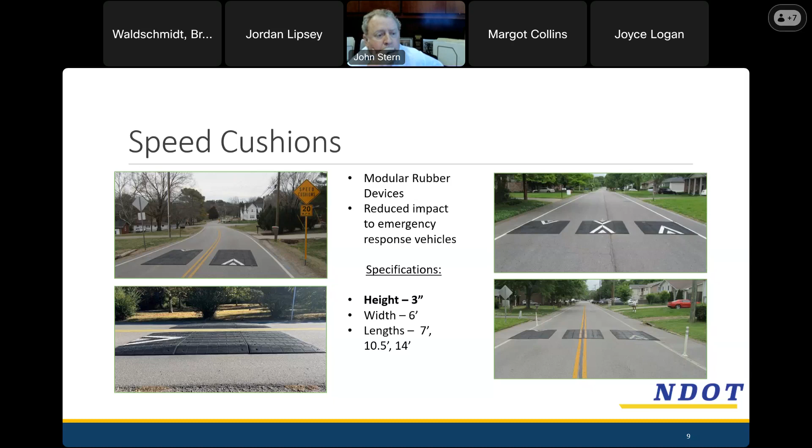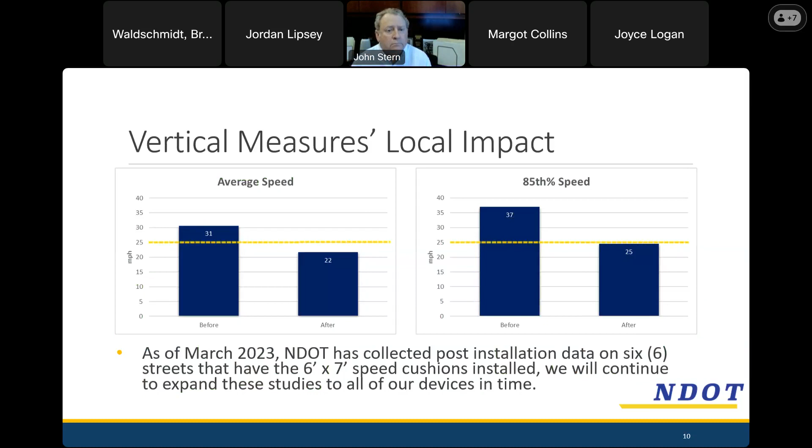And this graph just demonstrates that at NDOT, there have been some before and after studies. We're seeing lowered vehicle speeds once speed cushions get installed on other streets where before and after studies for speed have been done. So we do see that.

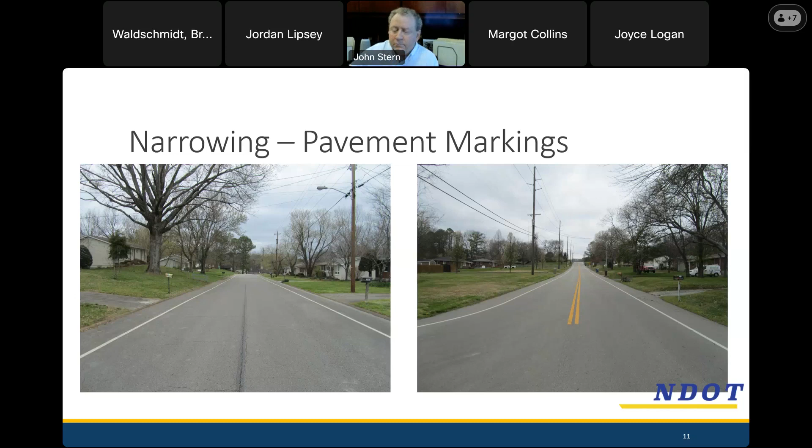We will show that in more detail as well in the design. Another thing that we're proposing, not so much the picture on the right, well, I guess a little bit, since chicanes and bulb outs, some of the intersections along this corridor really just are a very large area of pavement. And so what we wanted to do is, along with the narrowing theme, along with the speed cushions, we wanted to propose some narrowing with some additional white pavement markings, not crosswalks, but white line pavement markings and some of

those vertical white bollards. And on the right, you see it's called a chicane, where a vehicle somewhat has to turn their steering wheel just a little bit to kind of stay straight. So we want to kind of show that as well. So those are the 3 features that we're proposing.

Now, what we want to do is talk through what we're proposing. This is very zoomed out. We have, I think the design's about 6 slides. This is the zoomed out version. Then we're going to zoom in a little closer, and then we're going to zoom in even closer. So just kind of bear with us as we kind of talk through this.

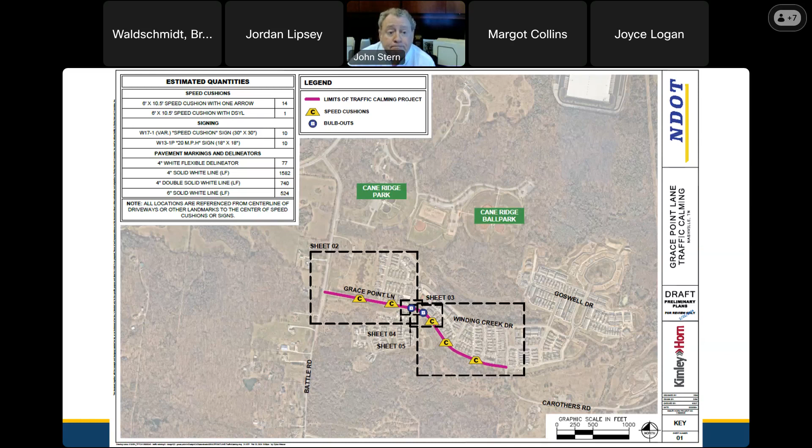We're going to zoom in, start on the west side at the intersection of, I know it's labeled Grace Point Lane, but really there it's Battle Road at Carothers Road. We want to start there. On this sheet, we're proposing 2 speed cushion locations. One is essentially almost in the middle of Battle Road and the western Fairchild Circle intersection. That's where that first set of speed cushions would be based on this design.

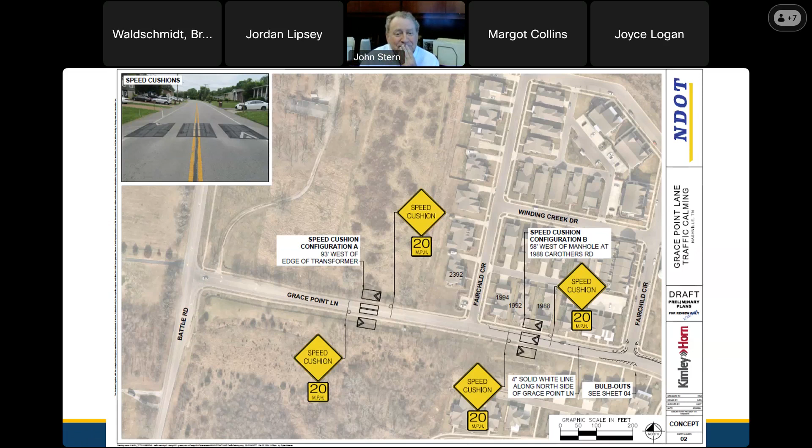Another thing, I know this may be difficult to see, with the width of Grace Point Lane and Carothers Road, we wanted to sort of provide those white line narrowings that we mentioned, but we didn't feel like there was enough width to do it on both sides. So what we were proposing, there's some notes kind of on the bottom here. We are proposing a 4 inch width white line along the north side of Grace Point Lane. So essentially the side where the homes are, we're proposing that narrowing.

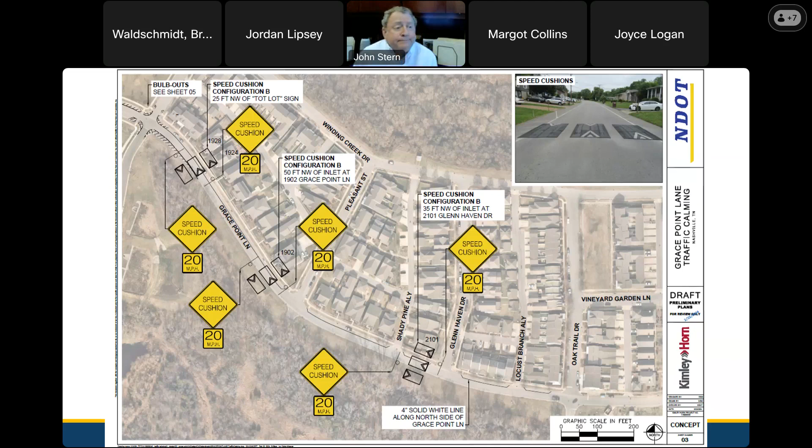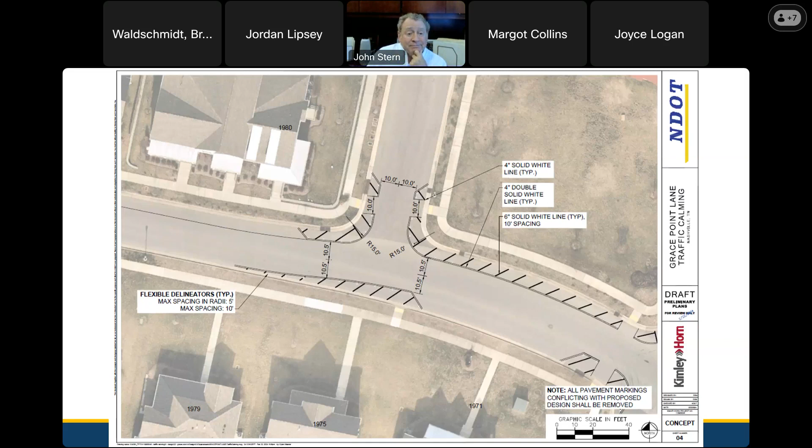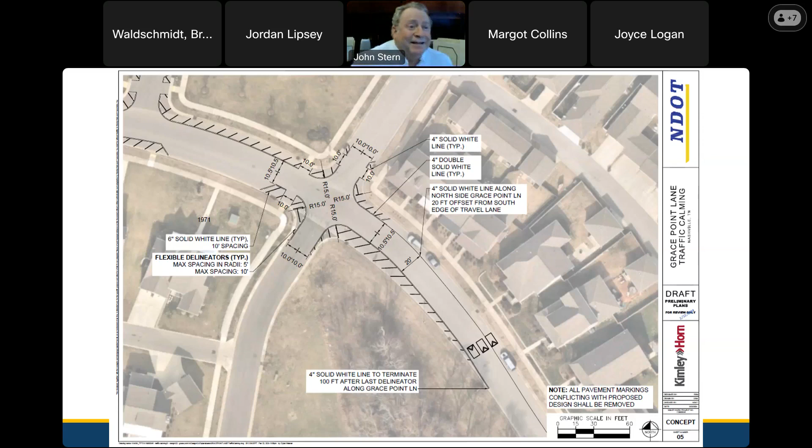So that is a lot. When we're done with the presentation in about 6 minutes or so, we're absolutely willing to come back to hear comments or answer questions.

For the speed cushions, this is sort of if you were floating in the air right over them and looking down, this is what they're going to look like. The one on the upper left is right near Battle, where there's that double yellow. And then all the others are more like the upper right corner. We do 3 speed cushions because we don't want to have a wide area of pavement where the cars who may still want to speed have a lot of room where they can circumvent the speed cushions. So that's why we're proposing 3, so that the gaps aren't too big where cars can try to do what they're not supposed to.

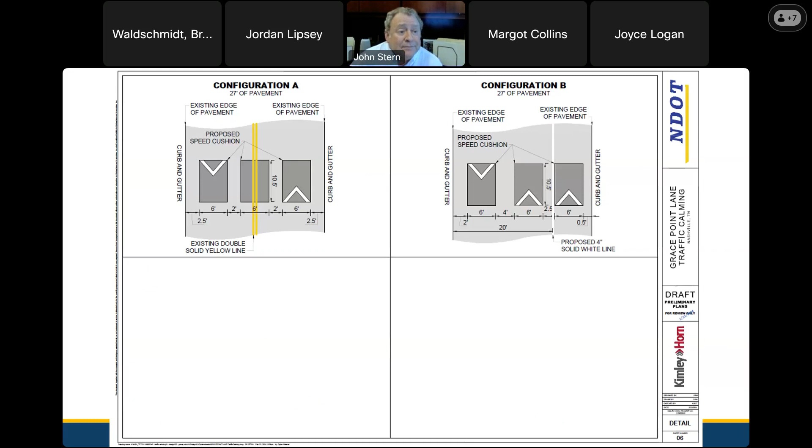So that's the design. Again, definitely can go back to it during Q&A. Want to talk about process and what the next steps would be. So you'll see the second meeting, that's what we're in right now, that kind of bottom colored in red a little bit.

The next step would be an online ballot. Very cool. Metro Nashville, the traffic calming program, it starts with citizens in neighborhoods just like you all applying for traffic calming on a street. Then NDOT goes through the process, selects streets. We, the engineers, design something, working with you all. And ultimately, the decision on whether it gets built or not comes back to you all.

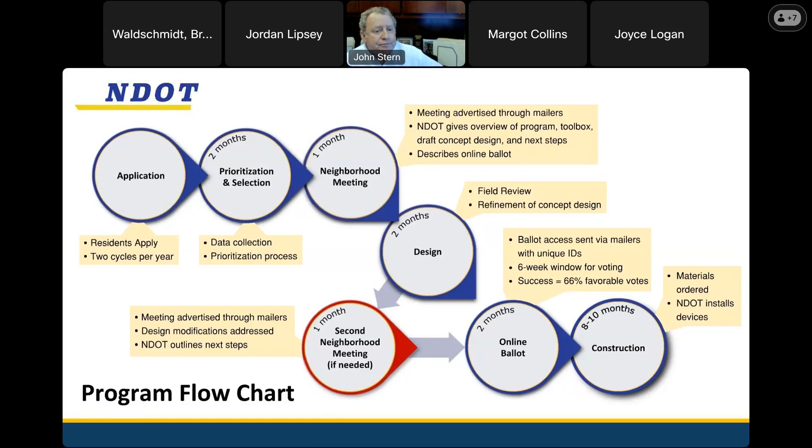After 6 weeks, we'll close the voting. We'll tally them. And if 2/3 of everyone who votes yes, then this traffic calming project will get built. But if that 2/3 of the voters do not vote yes, then the traffic calming project would not happen. So that is the threshold. And it is not of all the property owners who receive a ballot, it is of those who vote. So a non-response from a property owner doesn't help or hurt. It just simply isn't in the formula.

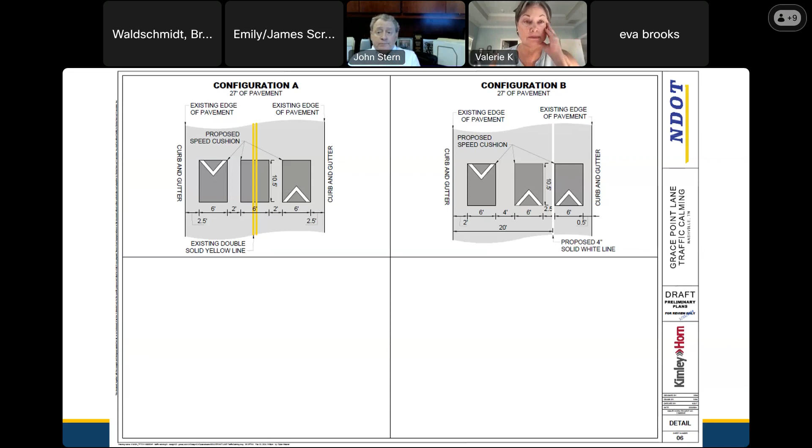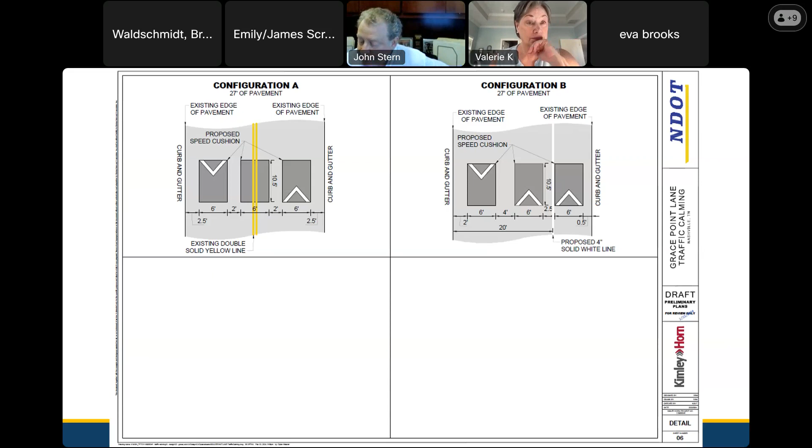Hey, Brad, this is James. I live off of Grace Point, and really just had a question. Well, first off, I'm relatively new to this community, so this is the first presentation I've been to, and this looks really great. My only question is on those delineators. Do you know what color they're going to be, and do you have any illustrations of what that might look like? Yes, they will definitely be white.

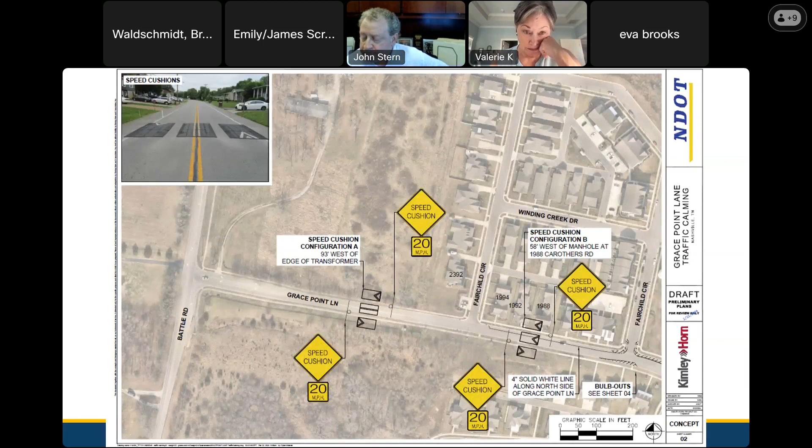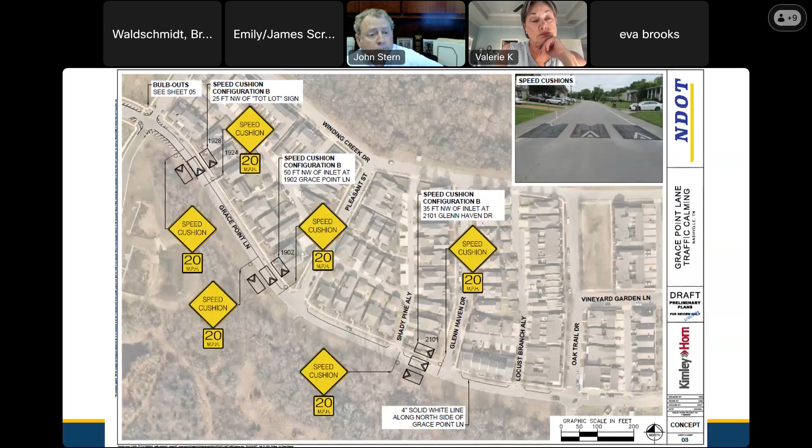And last and final question: how would you say that impacts the appeal or aesthetics of a neighborhood? Thinking back to driving through a Franklin neighborhood or any of the high end home areas, you don't really see any delineators, although they probably don't face issues with speed so much. My concern would be the impact on the aesthetics of the community. Yeah, that's a great question. I'm an engineer, so I like to have very detailed answers, and I probably don't have the most detailed answer. What I can say is, this will change some of the aesthetics. It'll be different. If the vote passes, there will be some black speed cushions, and some of these white markings and white delineators.

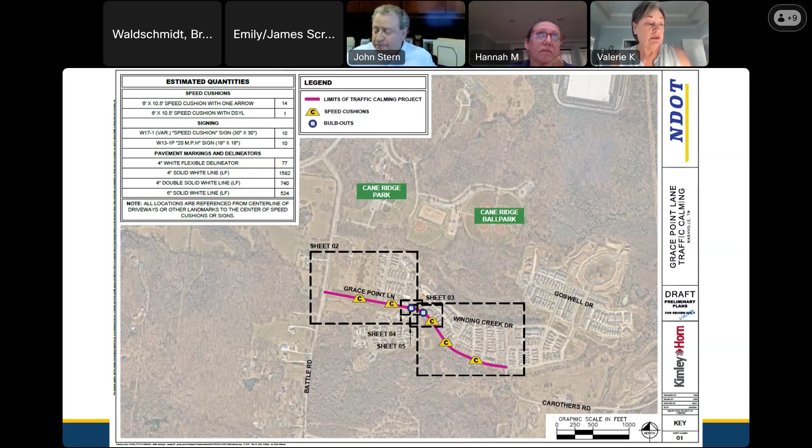Yeah, I mean, procedurally, the vote would be the next step. I'll just go back to the graphic to bring it up. The residential property owners along the corridor will be able to vote. The voting results will determine whether the traffic calming design we've presented is built or not.

So, the Nashville neighborhood street traffic calming program does not get implemented on privately owned streets. So the fact that we're even considering this area, Carothers Road and Grace Point Lane from Battle to Oak Trail Drive, is because I believe it is a public road. It is owned and maintained by NDOT, and so that's where the NDOT traffic calming procedure would occur here with the voting process.

I have one more random question. Yes. Since our neighborhood is not fully built out, can the developer say or do anything against this vote if people say yes, they want the cushions, can they do anything to change that, as they still have a lot of construction vehicles that may utilize Grace Point, or is that a no-go because it is Metro's responsibility now?

So two thoughts. First of all, we have not seen that happen yet in the neighborhood street traffic calming program, so historically, I do not see that happening. Secondly, we did spend a little more time between meeting one and tonight. Usually it does not take that long, but because this is partly within the UDO, we coordinated with more internal NDOT teams outside of the traffic calming team than we normally would to make sure we understood.

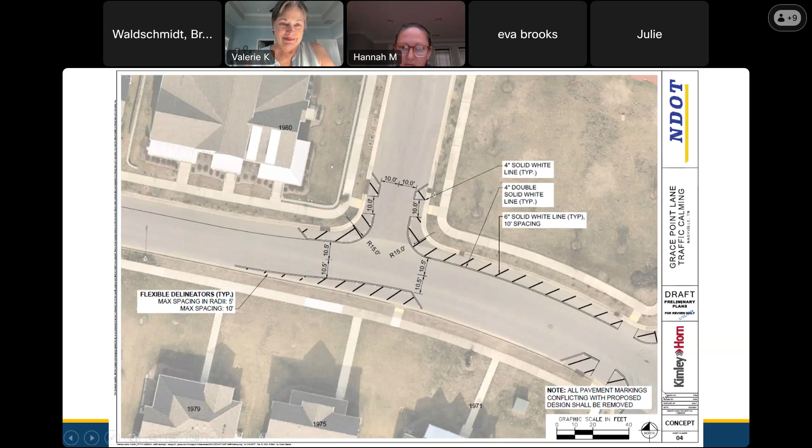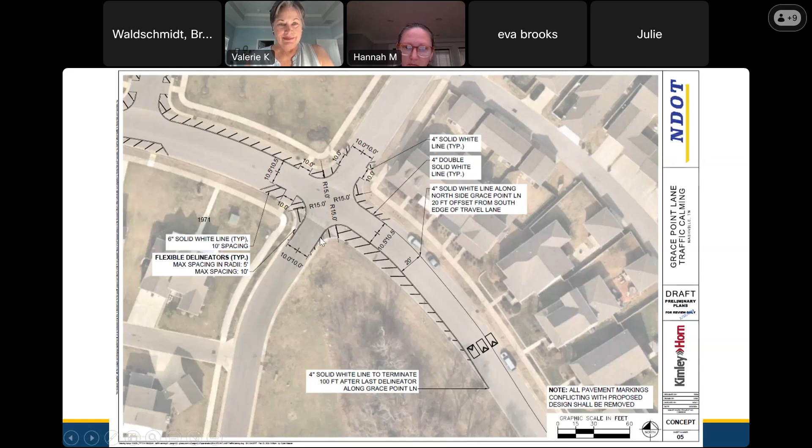I'm going to go to the next slide, which will show, it's not labeled, but this is the Clement Street intersection. We're also showing kind of that narrowing. It's very hard to see, but in addition to all these black lines, which will actually be white when they get marked, there's also some of those white sticks. But that's great because that's plenty of visual for people to see and slow down.

What about crosswalk lines? Are y'all doing that? At least the white lines in the road that indicate crosswalk? We are not. We typically in the traffic calming program don't do crosswalks, but we are leaving the gaps in those markings that we've been talking about. So if the neighborhood wants to go through Hub Nashville and request NDOT do crosswalks, we're leaving the space for them, but we will not be doing crosswalks as part of traffic calming.

Okay, all right. That would still be nice, because we cross that street all the time, so it would be good to have that visual there. Understood. The thought is that hopefully with the traffic calming, the flex delineators, and the markings narrowing the width of the so-called crossing, that would improve pedestrian crossing. That's sort of our thought.

That's great. I really appreciate what you've done. You've done a lot of work there. That is a lot of work. Yeah, our team working with NDOT. I'll repeat, this area with the steep hill, we knew a speed cushion couldn't go here, so we wanted to give something that we thought might work and see what y'all's feedback was. So we appreciate the feedback.

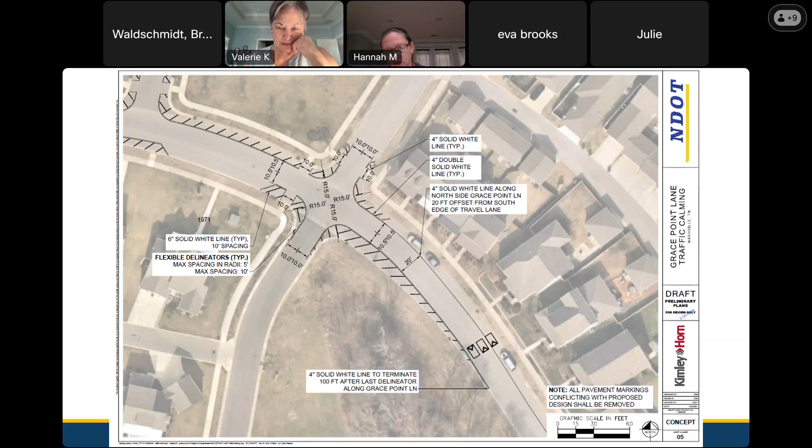Yeah, looks good. Brad, one more quick question. Along with the email that you'll send me with the presentation, could you send me a link to that YouTube so I can get that out to people that were not on the meeting? Absolutely. We can definitely send you, Eva, the presentation. Usually it takes NDOT a couple of days, and we're coming up on a weekend, so it won't be in the same email. But once the YouTube video is posted, I can send you an email with that link. Just know it may be a little delayed.

That's one reason why we're probably not going to send the mailer ballots out next week, to give some time to get that video posted. We're thinking maybe two weeks out is when the ballots would go. So Eva, you may see two emails from us for that reason. It'd be great if you could send Eva the presentation. That way we can get working on the internal communication strategy. Thank you, Brad. Thank you, Eva.

Thank you, everybody. Hey, I have one more question, Brad. Yes. I'm going to override Hannah on this. So you're mailing out these votes, correct? We're mailing out the ballots, and people can then go to the NDOT website to cast their vote. So will we also be able to email that website out to the people that live on Carothers if they don't get it in the mail or don't check their mail? You could, but they won't have their unique ID code, because each mailer ballot will have a different alphanumeric code. So what we encourage, there is a phone number on the mailer ballot as well.